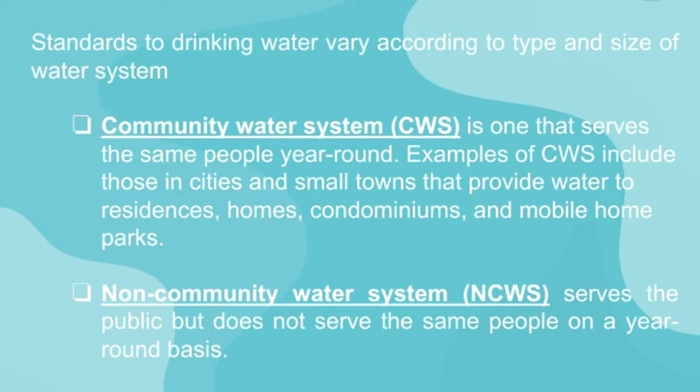A community water system serves the same people year-round, such as those in cities and small towns providing water to residences, homes, condominiums, and mobile home parks. A non-community water system serves the public but not the same people year-round. Within this, a non-transient non-community water system serves the same people for 6 months but not year-round, while a transient non-community water system serves the public but not the same individuals for more than 6 months. Rest areas and campgrounds are examples of transient non-community water systems.

Drinking water standards are classified as either primary or secondary. The primary drinking water standards are established to ensure safe, finished water, and include microbiological organisms, disinfection byproducts, organic chemicals—many of which are priority pollutants—inorganic chemicals, radionuclides, and turbidity.

The secondary drinking water standards are not related to health and are therefore non-enforceable by the US EPA. Secondary contaminants cause a variety of problems categorized as aesthetic, cosmetic, and technical effects, relating to the aesthetic quality of the water and making it more desirable to the consumer.

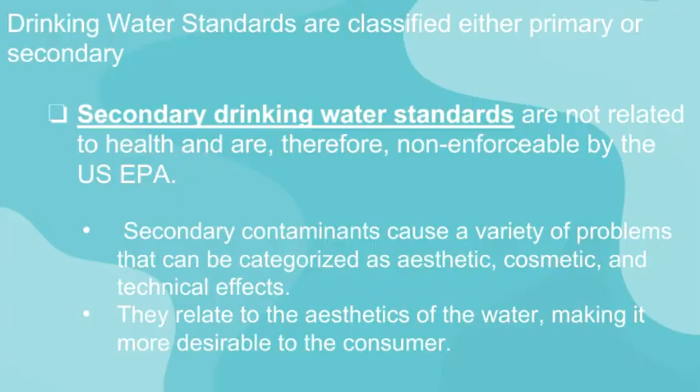Other rules promulgated by the EPA include the Groundwater Rule. Its purpose is to reduce disease incidence associated with microbial contaminants in drinking water, and it applies to all systems that use groundwater as a source of drinking water.

The Long-Term 2 Enhanced Surface Water Treatment Rule, or LT2 rule, is designed to reduce illness linked with the contaminant cryptosporidium and other disease-causing microorganisms.

The Stage 2 Disinfectants and Disinfection Byproducts Rule focuses on public health protection by limiting exposure to disinfection byproducts, especially total trihalomethanes and 5-haloacetic acids.

The Long-Term 1 Enhanced Surface Water Treatment Rule aims to improve the control of microbial pathogens in drinking water, especially the protozoan cryptosporidium, and to address risk trade-offs with disinfection byproducts.

The Filter Backwash Recycling Rule governs the process of recycling wash water from the backwashing of drinking water filters, as a method of reducing potential risk to consumers from microbial contaminants.

The Arsenic Rule requires monitoring for new systems and new drinking water sources, and also clarifies procedures for compliance with MCLs established for inorganic contaminants, synthetic organic chemicals, and volatile organic chemicals.

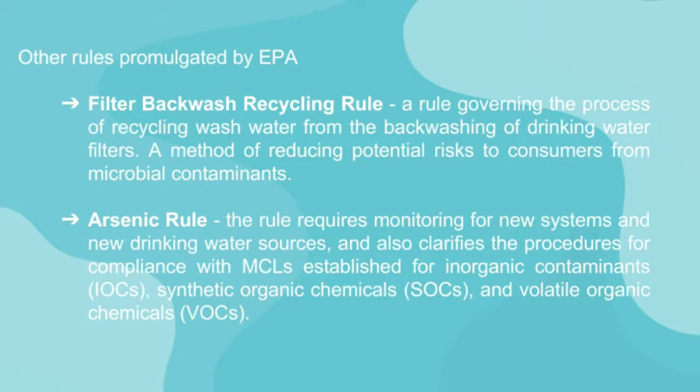The Lead and Copper Rule: on June 7, 1992, the US EPA published a regulation to control lead and copper in drinking water. The rule requires all community water systems and non-transient non-community water systems to comply.

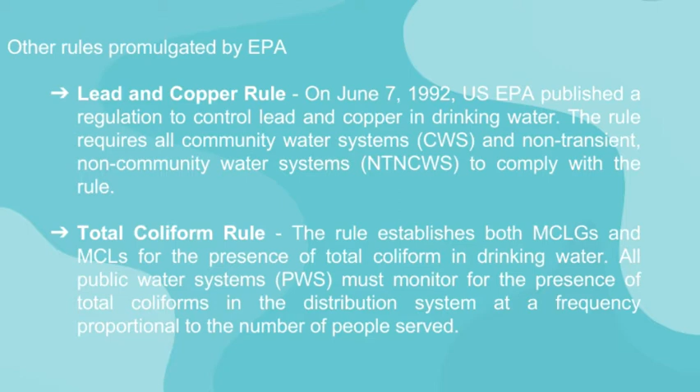The Total Coliform Rule establishes both MCLGs and MCLs for the presence of total coliform in drinking water. All public water systems must monitor for the presence of total coliforms in the distribution system at a frequency proportional to the number of people served.

The Stage 1 Disinfectants and Disinfection Byproducts Rule improves drinking water quality by providing protection from disinfection byproducts.

The Interim Enhanced Surface Water Treatment Rule improves the control of microbial contaminants, particularly cryptosporidium, in drinking water systems serving 10,000 persons or more that use surface water or groundwater under the direct influence of surface water.

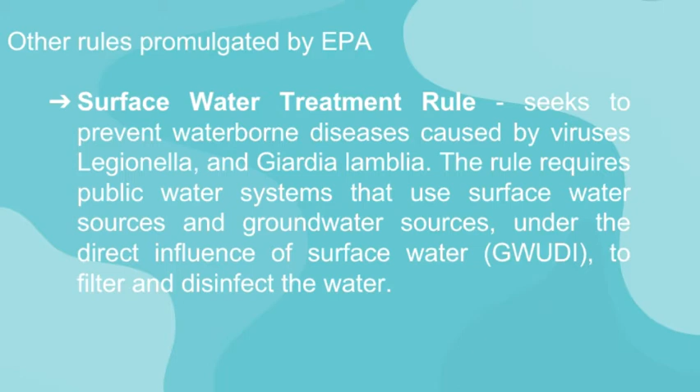The Surface Water Treatment Rule seeks to prevent waterborne diseases caused by viruses, Legionella, and Giardia lamblia. The rule requires public water systems that use surface water sources and groundwater sources under the direct influence of surface water to filter and disinfect the water.

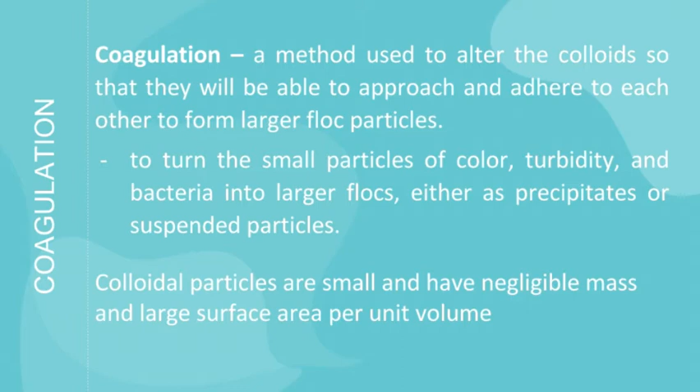Coagulation is a method used to alter colloids so that they can approach and adhere to each other, forming larger floc particles. In other words, it turns the small particles of color, turbidity, and bacteria into larger floc, either as precipitates or suspended particles.

Colloid destabilization: colloids are stable because of their surface charge. To destabilize the particles, we must neutralize this charge. Such neutralization can take place by adding an ion of opposite charge to the colloid. Since most colloids found in water are negatively charged, the addition of positive ions should reduce the charge.

Key components of a coagulant: first, the trivalent cation. As noted, the colloids most commonly found in natural waters are negatively charged, so a cation is required to neutralize the charge. A trivalent cation is the most efficient cation for this purpose.

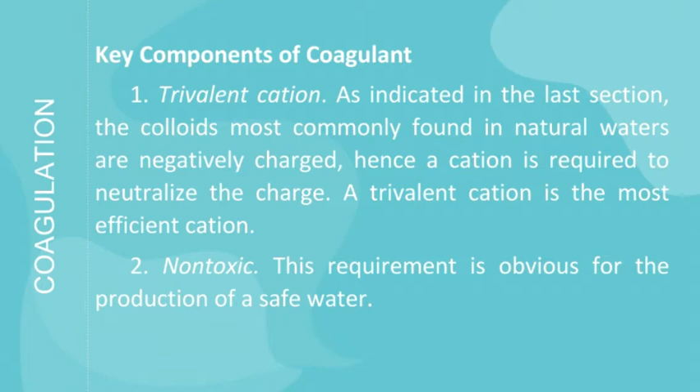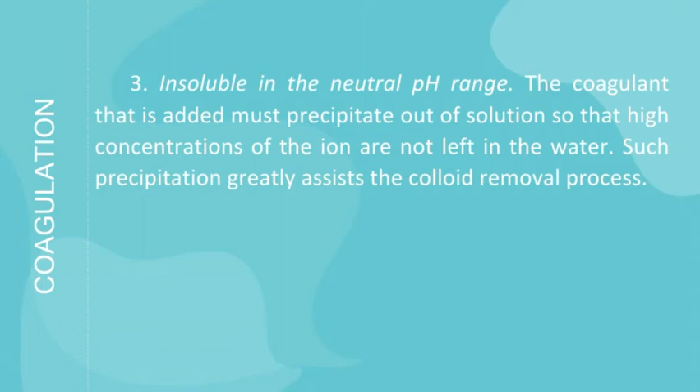The coagulant must also be non-toxic, an obvious requirement for producing safe water. Moreover, it should be insoluble in the neutral pH range. The coagulant added must precipitate out of solution so that high concentrations of the ion are not left in the water, which greatly assists the colloid removal process.

These precipitates are called floc. Floc formation is one of the most important properties of a coagulant for efficient colloid removal. The coagulation process by aluminum is done by adsorption and charge neutralization, and sweep flocculation.

Ferrous sulfate. Oxygen is required for oxidizing the ferrous ion to ferric, since ferrous hydroxide is soluble. The pH must be raised to approximately 9.5 so that the ferric ions are precipitated as ferric hydroxide.

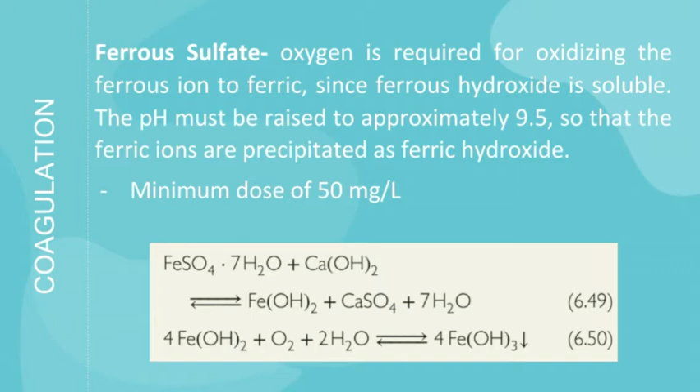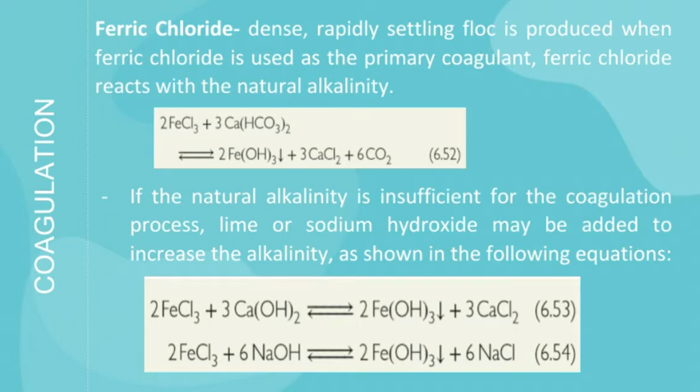Ferric chloride. Dense, rapidly settling floc is produced when ferric chloride is used as the primary coagulant. Ferric chloride reacts with the natural alkalinity.

Coagulant aids: pH adjusters. These comprise acids and alkalis used to adjust the pH of water to the optimum level during coagulation. The acid commonly used to lower the pH is sulfuric acid, while the bases commonly used to raise the pH are either lime or soda ash.

Activated silica. The addition of activated silica is especially useful for treating highly colored, low turbidity waters because it adds weight to the floc. However, activation of silica does require proper equipment and close operational control, and many plants are hesitant to use it.

Clay. It acts just like activated silica, adding weight to the floc but with slightly negative ions, useful for colored, low turbidity water, but clay is not commonly used.

Polymers are long-chain carbon compounds of high molecular weight that have many active sites, and can be anionic, cationic, or non-ionic. The active sites adhere to floc, joining them together and producing a larger, tougher floc that settles better. This process is called interparticle bridging.

Softening. Softening is the removal of polyvalent cations from water that cause hardness. The hardness in water is primarily attributed to the divalent metallic cations like calcium ions and magnesium ions. There are two softening methods: boiling and chemical precipitation.

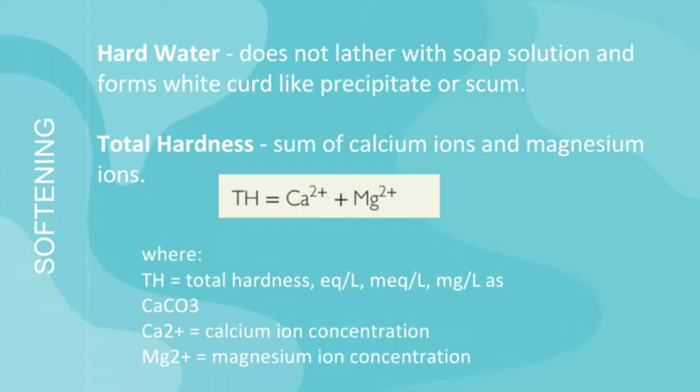There are two types of hardness: carbonate hardness and non-carbonate hardness. Carbonate hardness is associated with carbonate and bicarbonate anions. It is only temporary hardness and can be removed by boiling or by addition of lime, while non-carbonate hardness is permanent hardness and can only be removed by chemical precipitation.

Conditions: if alkalinity is lesser than the total hardness, then the carbonate hardness is equal to the alkalinity. But if alkalinity is greater than or equal to total hardness, then the carbonate hardness is equal to the total hardness, and the non-carbonate hardness is 0. The non-carbonate hardness is the difference between total hardness and carbonate hardness.

Chemical precipitation is accomplished by adding lime and soda ash to water. If magnesium ion concentration is less than 40 mg per liter as calcium carbonate, and non-carbonate hardness is not present, then soda ash may not be used.

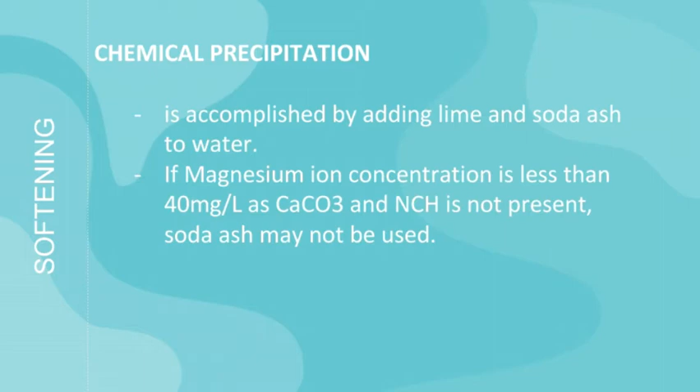The dissolution reactions and solubility expressions for calcium carbonate and magnesium hydroxide at 25 degrees Celsius.

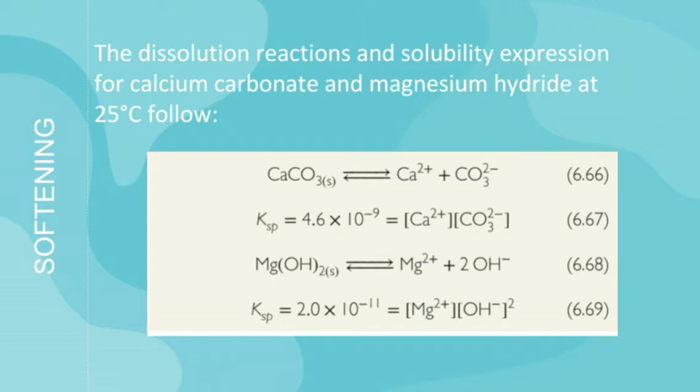When the product of the calcium ion concentration and the carbonate ion concentration exceeds the solubility product of calcium carbonate, it will be precipitated from solution, resulting in a lower calcium ion concentration.

Magnesium hydroxide is formed by adding hydroxyl ions. These hydroxyl ions are found in calcium hydroxide, which is found in hydrated lime. If hydrated lime is not available, quicklime is used to form hydrated lime. Quicklime is added to the water, and this process is called slaking.

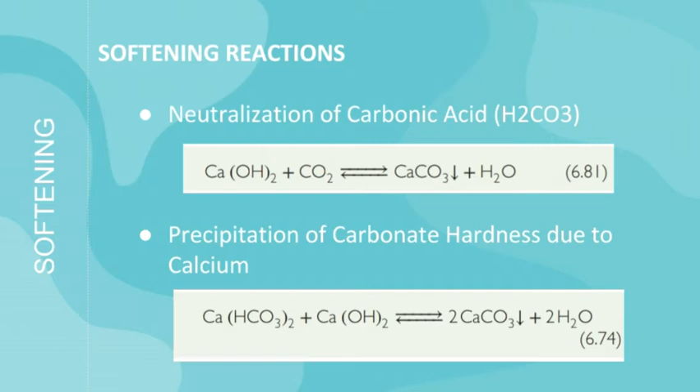The softening reactions: neutralization of carbonic acid, precipitation of carbonate hardness due to calcium, precipitation of carbonate hardness due to magnesium, removal of non-carbonate hardness due to magnesium, and removal of non-carbonate hardness due to calcium.

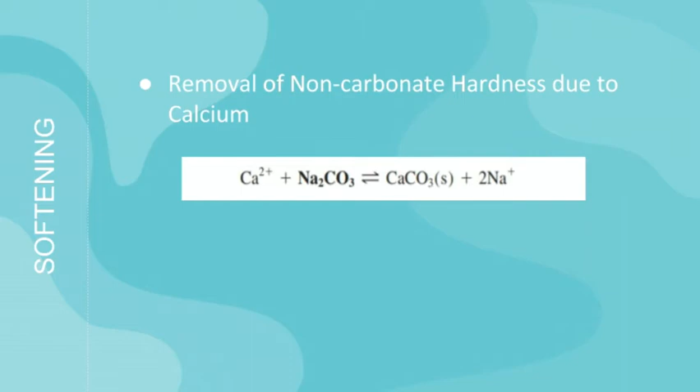Single-stage softening, or selective calcium removal, can be used on waters with a magnesium concentration less than 40 mg per liter as calcium carbonate.

First stage treatment consists of flash mixing of lime, followed by flocculation, sedimentation, recarbonation, and filtration. Flocculator clarifiers or solids contact units are often used in place of conventional coagulation, flocculation, and sedimentation. Lime is added in the first stage to meet stoichiometric requirements for neutralization of carbon dioxide, if present, and calcium carbonate hardness precipitation as calcium carbonate. An excess dosage of lime, typically 1.25 mEq per liter, is added above stoichiometric amounts to raise the pH above 11 for the precipitation of magnesium as magnesium hydroxide.

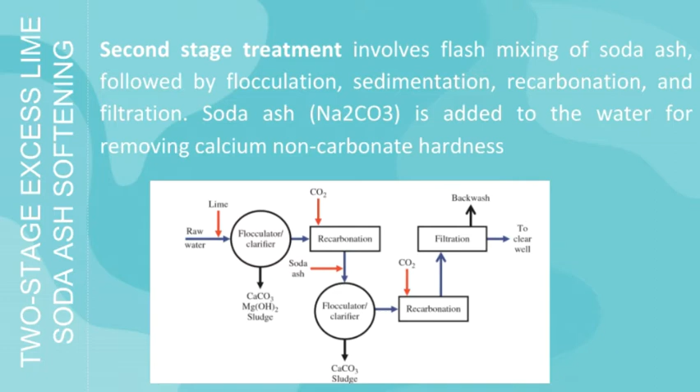The second stage treatment involves flash mixing of soda ash, followed by flocculation, sedimentation, recarbonation, and filtration. Soda ash is added to the water for removing calcium non-carbonate hardness.

Softening using the split treatment scheme involves treating a portion of the raw water by excess lime treatment, then blending this softened water with the remaining portion of raw water bypass. The ratio of bypass flow to treated flow is determined using the following equation.

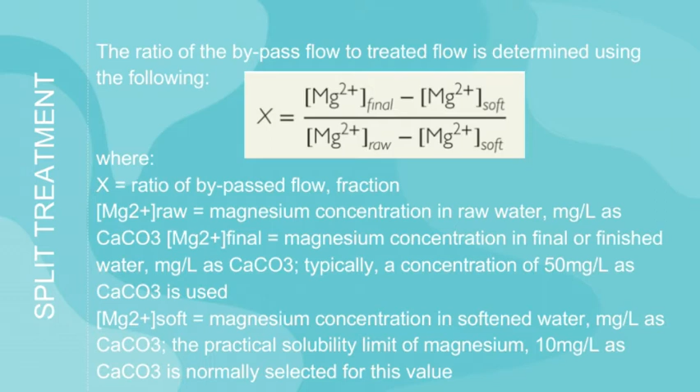Another softening method is the ion exchange process.

Mixing and flocculation: the process whereby chemicals are quickly and uniformly dispersed in the water is called mixing or rapid mixing. The degree of mixing is measured by the velocity gradient, G, which is a function of the power input into a unit volume of water.

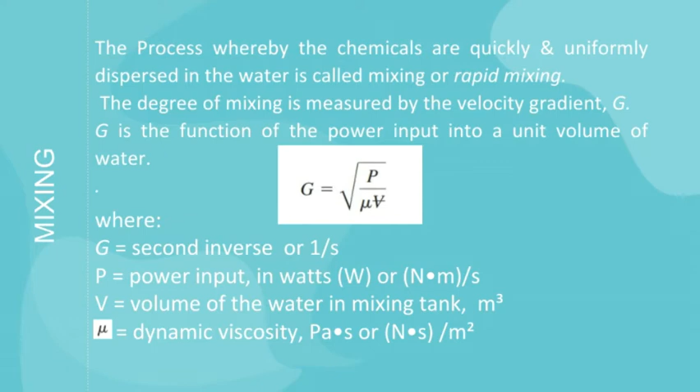If the value of velocity gradient G is high and time T is low, the flocs are small and denser. If the value of G is low and T is high, the flocs are larger.

Rapid mixing is probably the most important physical operation affecting coagulant dose efficiency. Rapid mixing can be accomplished within a tank utilizing a vertical shaft mixer, within a pipe using an inline blender, or in a pipe using a static mixer. Other methods such as parshall flumes, hydraulic jumps, baffled channels, or air mixing may also be used.

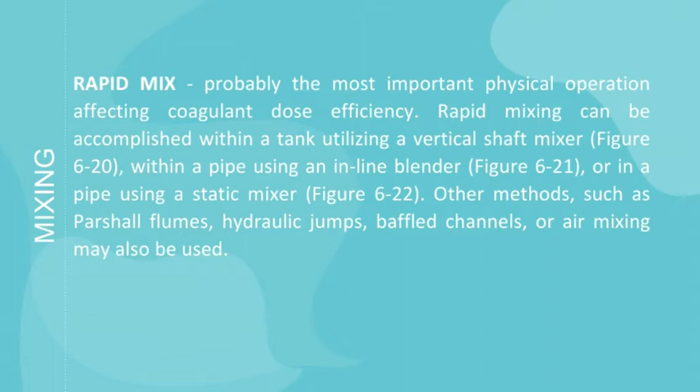In rapid mixing tanks, the radial flow impeller provides more turbulence and is preferred for rapid mixing.

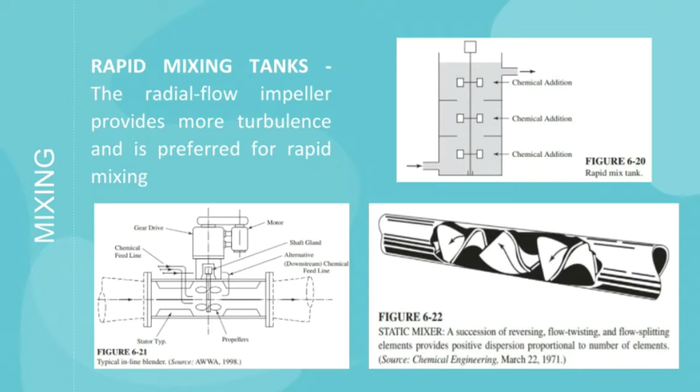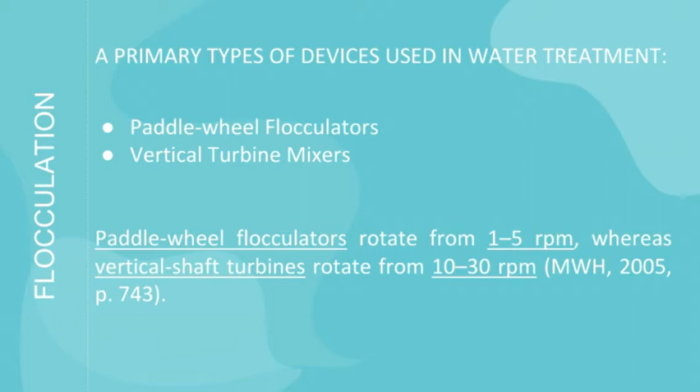Flocculation is the contacting process of precipitates formed during coagulation and softening to form larger particles called flocs, done by slow, gentle mixing. Primary types of devices used in water treatment are paddle wheel flocculators and vertical turbine mixers.

Paddle wheel flocculators may use horizontal or vertical shafts, but typically horizontal shafts are preferred at conventional water treatment plants. In recommended standards for waterworks, engineers are encouraged to use tapered flocculation to produce large, dense floc.

Tapered flocculation, employing three separate compartments each at a different velocity gradient, is normally practiced so that a dense, good settling floc is produced. Typical G values used in the first, second, and third compartments respectively are 50, 20, and 10 seconds to the power of -1.

Normally, 0.70 to 0.80 of the paddle velocity is used in design calculations.

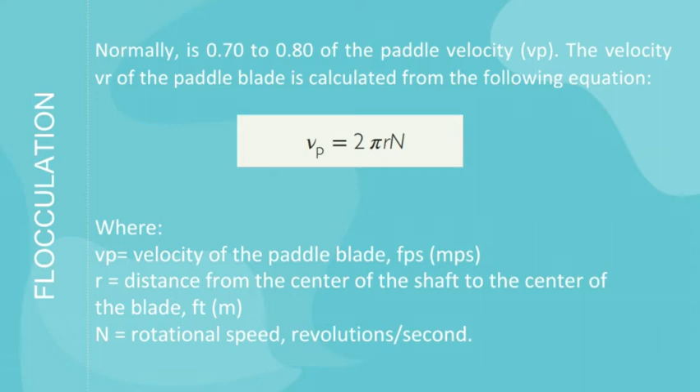Vertical shaft turbine flocculators are typically used in new water treatment plants and those that use direct filtration. This type of flocculator has an impeller attached to a vertical shaft that is rotated by an electric motor. There are different types of impellers that produce either radial or axial flow mixing.

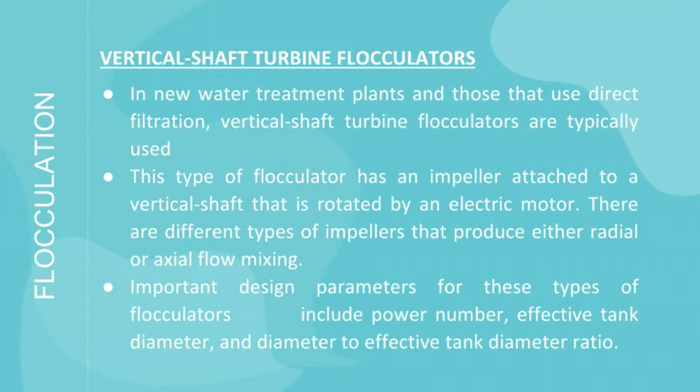Important design parameters for these types of flocculators include power number, effective tank diameter, and the diameter to effective tank diameter ratio. The power number is calculated using the following equation.

Sedimentation is a physical water treatment process using gravity to remove suspended solids from water. Gravity settling, or sedimentation, is considered a major unit operation involving solid-liquid separation using gravitational force.

Discrete settling occurs in grit chambers at wastewater treatment facilities and can be analyzed by calculating the settling velocity of the individual particles contained within the water. Three forces act on a particle as it settles: gravitational force, buoyant force, and drag force.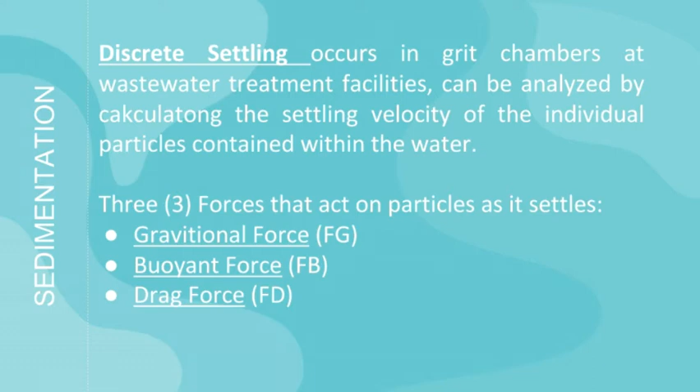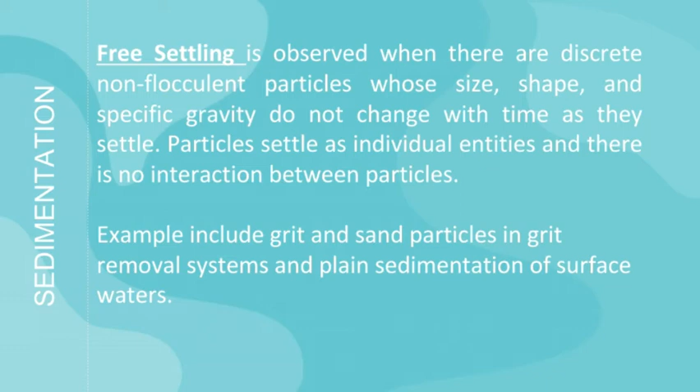Free settling is observed when there are discrete, non-flocculent particles whose size, shape, and specific gravity do not change with time as they settle. Particles settle as individual entities with no interaction between particles. Terminal settling velocity is the velocity reached by a particle as it falls through a fluid, dependent on its size, shape, and the difference between its specific gravity and that of the settling medium; it is used to sort particles by grain size.

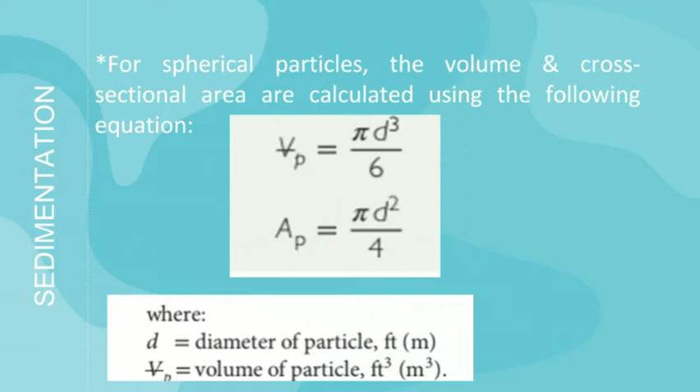For spherical particles, the volume and cross-sectional area are calculated using the following equation, leading to the settling velocity equation.

Flocculent settling occurs in primary clarifiers and during settling of coagulated water and wastewater. As flocculent particles settle, their size, shape, density, and settling velocity will change with time. Percent removal of suspended solids is then plotted as a function of depth and time, and is calculated using equation 6.96.

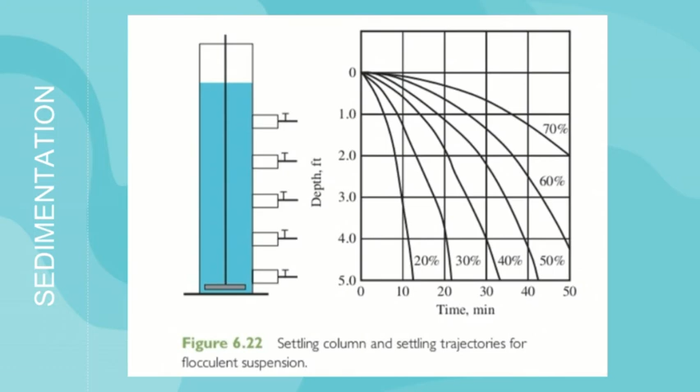Flocculent settling laboratory procedure: flocculent settling column analyses are typically performed in a clear PVC column with sampling ports spaced approximately 6 inches apart, using a column on the order of 5 to...

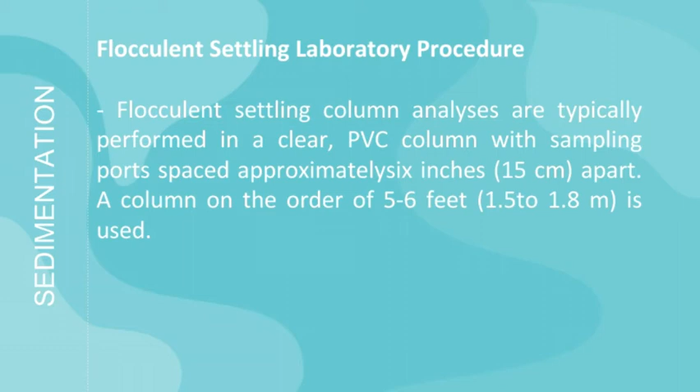Flocculent settling laboratory procedure: flocculent settling column analyses are typically performed in a clear PVC column with sampling ports placed approximately 6 inches apart, and a column on the order of 5 to 6 feet is used. The following is the procedure.

Ideal settling basin. Overflow rate serves as a design parameter used by engineers to determine the size of settling basins, whereas water treatment plant operators regulate the flow through the basin to maintain the proper detention time and overflow rate to achieve optimum solids removal.

The overflow rate is a different way of expressing the settling velocity of a particle as calculated using Stokes' law. Remember, settling velocity is a function of the diameter of the particle.

Theoretically, all particles with a diameter equal to or greater than the particle size as specified by overflow rate should be completely removed.

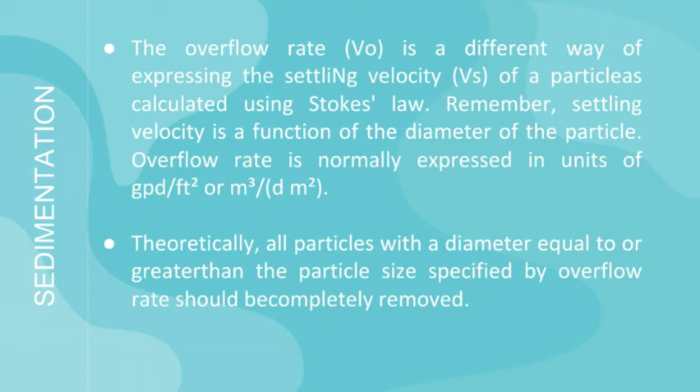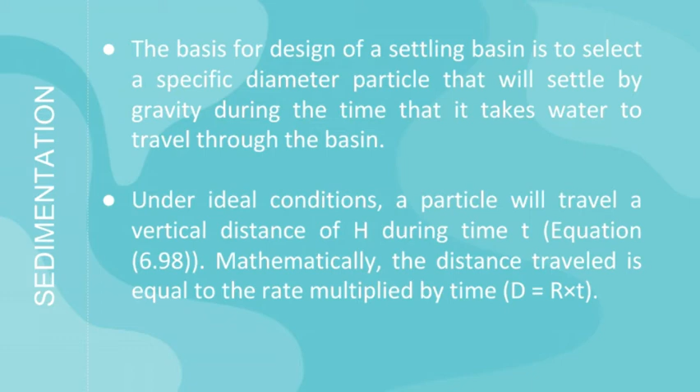The basis for design of a settling basin is to select a specific diameter particle that will settle by gravity during the time that it takes water to travel through the basin. Under ideal conditions, a particle will travel a vertical distance of h during t. Mathematically, the distance traveled is equal to the rate multiplied by time.

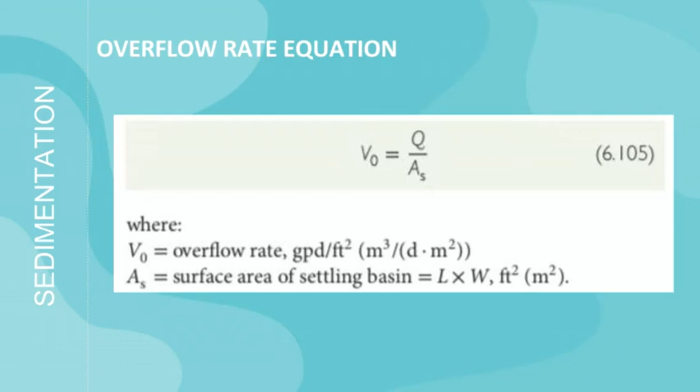Detention time or retention time is defined as the time that the water remains in the settling basin.

The weir loading rate, Q, is defined as the volumetric flow rate divided by the length of the effluent weir.

The weir loading rate is defined as the volumetric flow rate divided by the length of the effluent weir. Regulatory agencies sometimes specify weir loading rates that must be maintained in settling basins.

The settling basin design criteria are the following.

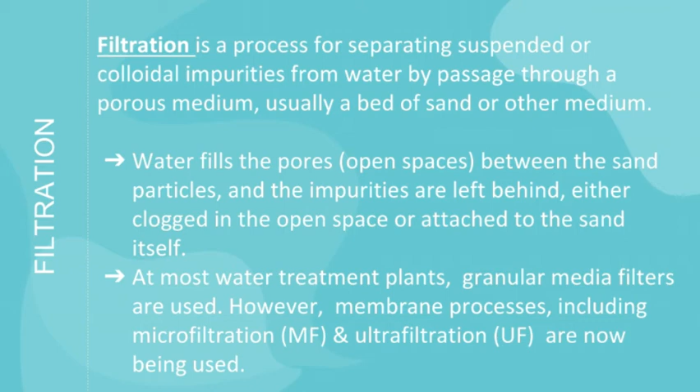Filter classification: there are numerous ways of classifying filters. Gravity filters are filters that are operated using gravity flow and operate in a downflow mode.

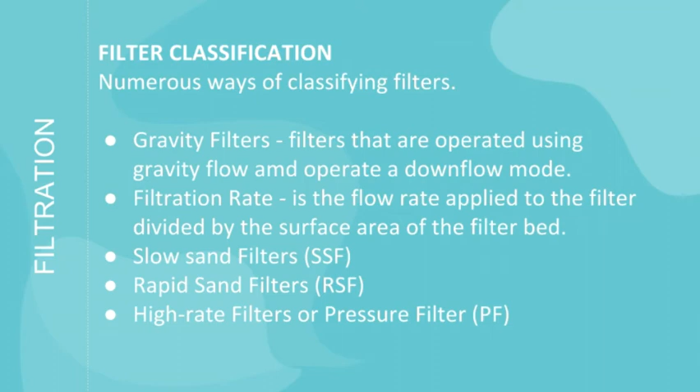Filtration rate is the flow rate applied to the filter divided by the surface area of the filter bed. Classifications include slow sand filters, rapid sand filters, and high rate filters or pressure filters.

The last classification method is based on the type of media used in the filter. Single media or monomedia filters use only one type of media, typically sand or crushed anthracite coal.

Dual media filters normally consist of a layer of coarse anthracite above a layer of sand. Multimedia filters, such as trimedia filters, consist of a top layer of anthracite coal, a middle layer of sand, and a bottom layer of ilmenite or garnet.

Suspended solids removal mechanisms depend on the filter media, specifically the effective size and uniformity coefficient.

Effective size is determined from the sieve analysis curve and represents the media size for which 10% by weight of grains are smaller. Uniformity coefficient is a measure of size range of the media, and is defined as the ratio of D10 over D60 sizes determined from the sieve analysis curve.

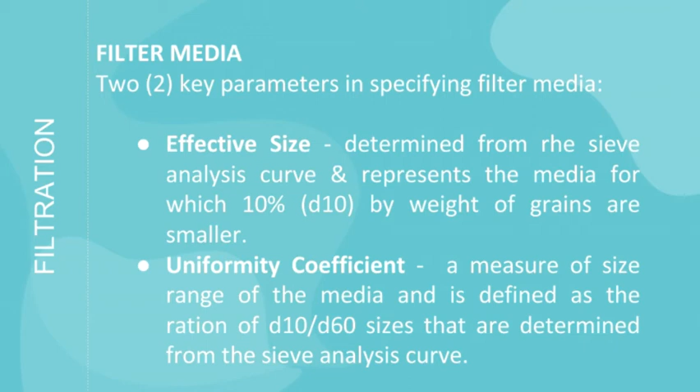Properties of filter media include effective size, uniformity coefficient, depth of media, and depth of media to effective size ratios for various types of filter media, as presented in the table.

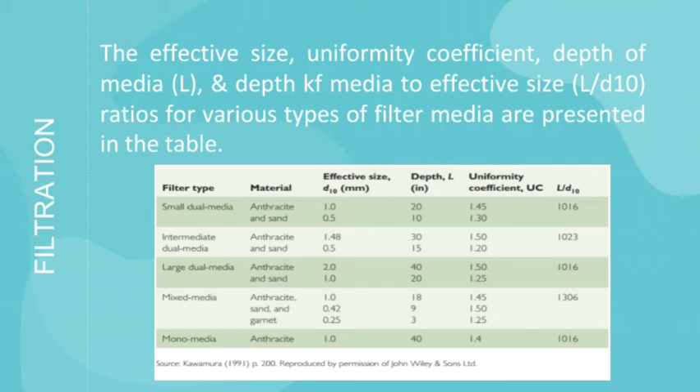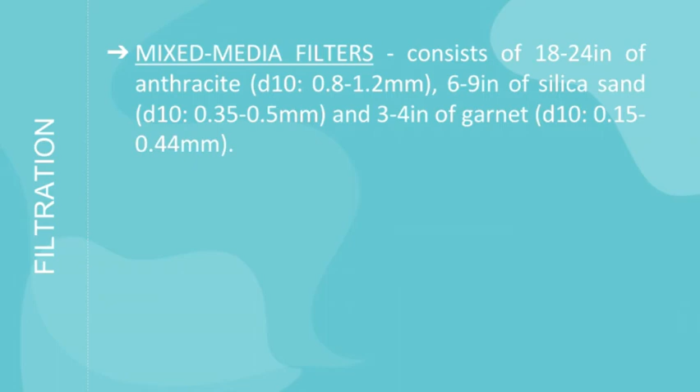Granular media filtration: the primary goal is to use the entire filter bed for solid removal rather than straining at the surface.

The Darcy-Weisbach equation.

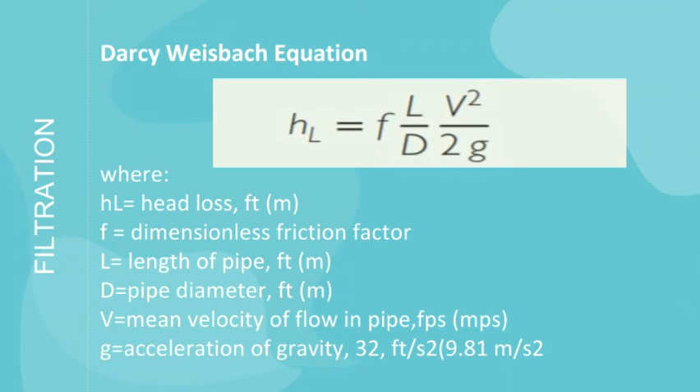The Karman-Kozeny equation for head loss across a clean filter bed is used to calculate the friction factor F.

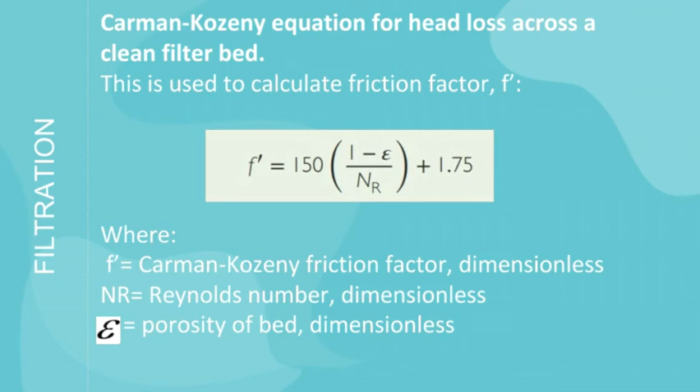The Ergun equation is the most widely used empirical equation for estimating head loss in a clean granular media filter.

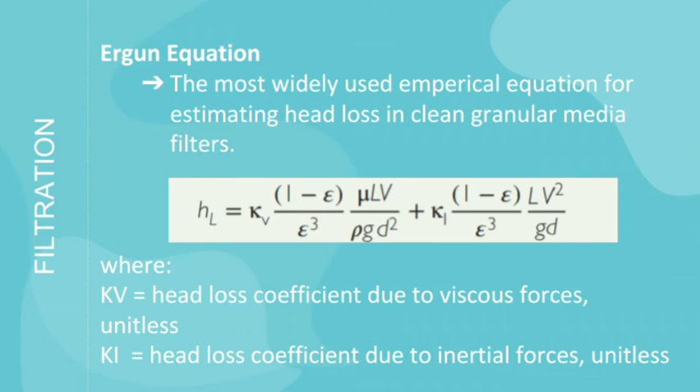Backwashing of filters: periodically, granular media filters must be backwashed to remove particulates and turbidity that build up during the filter run. Operators backwash a filter based on one of the following scenarios.

A: when the head loss through the filter reaches 8 to 10 feet. B: when the turbidity in the effluent reaches a specific level, such as 0.20 NTU, and when the filter has been in operation for a specified amount of time, for example, 24 to 96 hours.

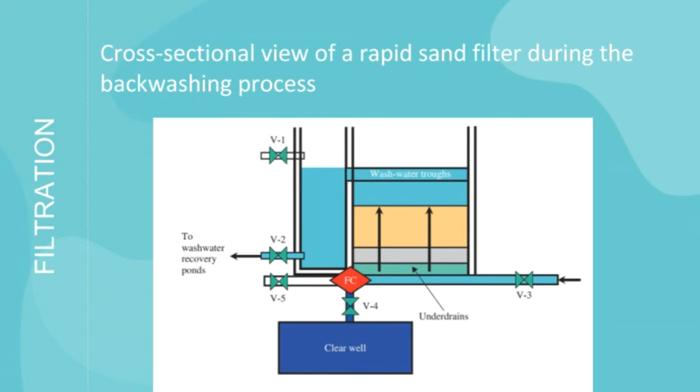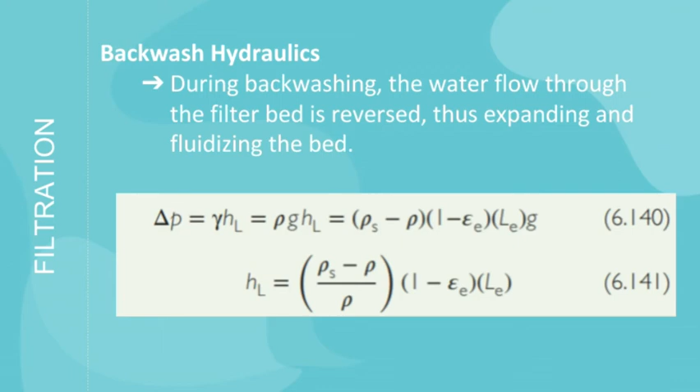Backwash hydraulics: during backwashing, the water flow through the filter bed is reversed, thus expanding and fluidizing the bed. The porosity of the expanded bed could be estimated using this equation.

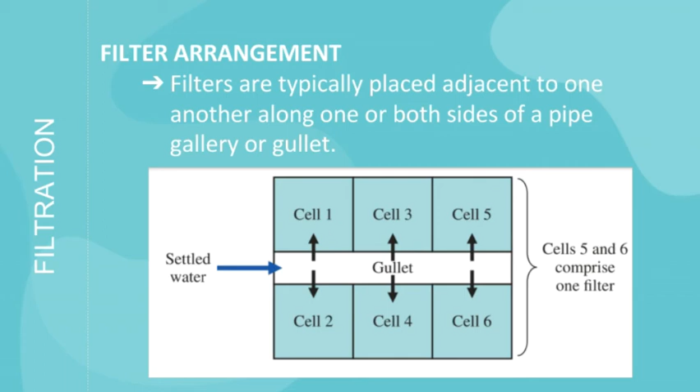Filter arrangement: filters are typically placed adjacent to one another along one or both sides of a pipe gallery or gullet. Rapid sand filters are usually rectangular in shape, with an average length to width ratio of about 1 to 2.5, and surface area ranging from 450 to 4,500 square feet.

Conventional gravity filters use length to width ratios of 2 to 1 and 4 to 1. Surface area of gravity filters typically ranges from 250 to 1,000 feet squared, and filter depths range from 12 to 20 feet.

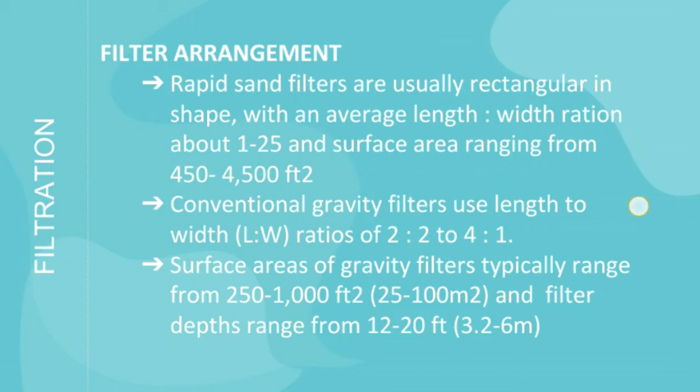Chlorine dioxide is a powerful oxidizing agent that has been used primarily to remedy taste and odor problems in drinking water. Chlorine dioxide must be generated on site by mixing solutions of aqueous chlorine with sodium chlorite, as shown below.

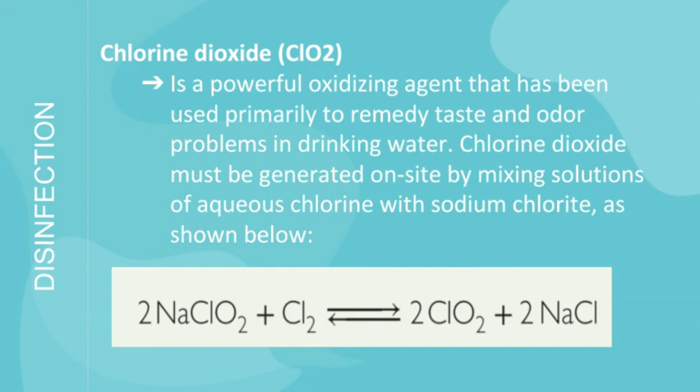Ozone is one of the strongest oxidants and disinfectants available. It is an allotropic form of oxygen that must be generated on site, typically by passing clean dry air or oxygen through a high-strength electrical field.

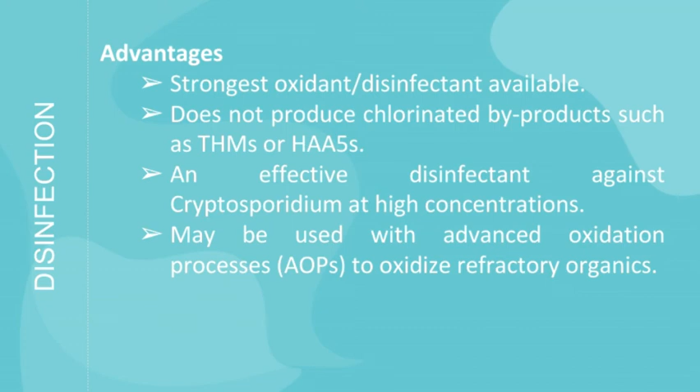The advantages of using ozone. The disadvantages.

Ultraviolet radiation, or UV, generated by mercury vapor arc lamps, is a non-chemical means of disinfection. UV radiation in the range of 245 to 285 nm is effective against bacteria and viruses. UV lamps are placed inside quartz sleeves which are then placed into the water.

The advantages of using UV. The disadvantages.

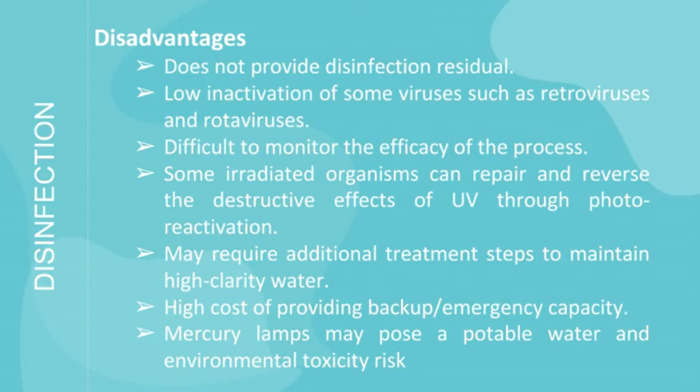Adsorption is a mass transfer process wherein a substance is transferred from the liquid phase to the surface of a solid where it is bound by chemical or physical forces.

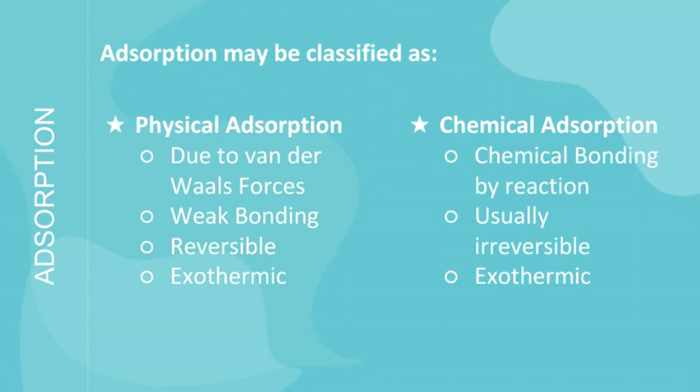Adsorption may be classified as physical adsorption or chemical adsorption. Physical adsorption is due to van der Waals forces; it has weak bonding and is reversible. Chemical adsorption is due to chemical bonding by reaction and is usually irreversible. Both classifications are exothermic.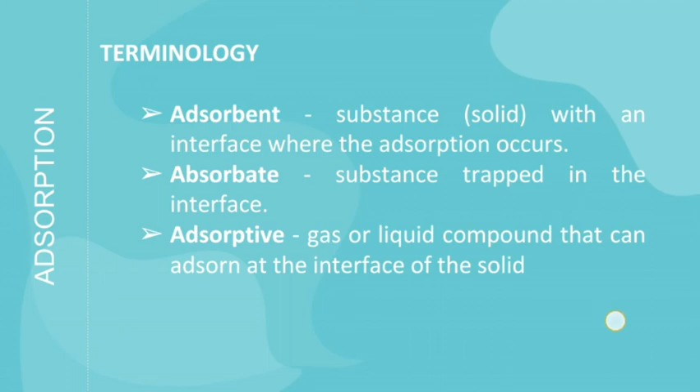Adsorbents used in water treatment: the most commonly used is activated carbon. But there are other existing adsorbents, such as natural or synthetic zeolites, natural clay minerals, silica gel, activated alumina, or silicic acid.

Activated carbon is the most commonly used adsorbent and is particularly suited to the removal of refractory organics. There are two types: powdered activated carbon, or PAC, and granulated activated carbon, or GAC.

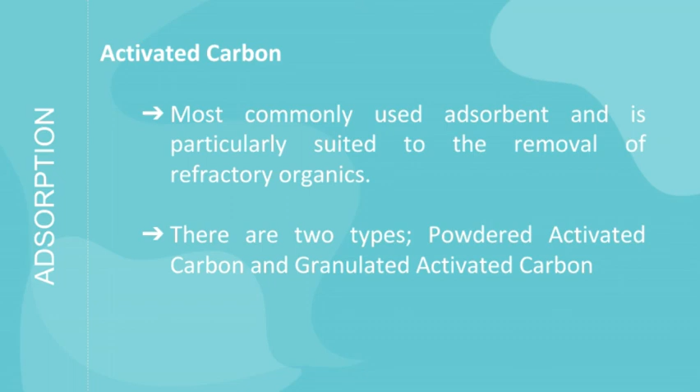The PAC is fed to the raw water as a slurry or powder and is generally used to remove taste and odor-causing substances, or to provide some removal of synthetic organic chemicals.

The GAC is added to the existing filter system by replacing the anthracite with GAC, or an additional contactor is built and placed in the flow scheme after primary filtration. GAC is proposed to be used to remove naturally occurring organic matter.

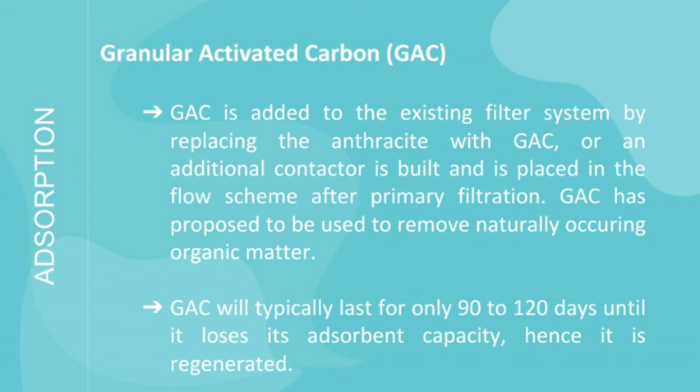GAC will typically last only 90 to 120 days until it loses its adsorbent capacity, hence it is regenerated. The effectiveness of using activated carbon.

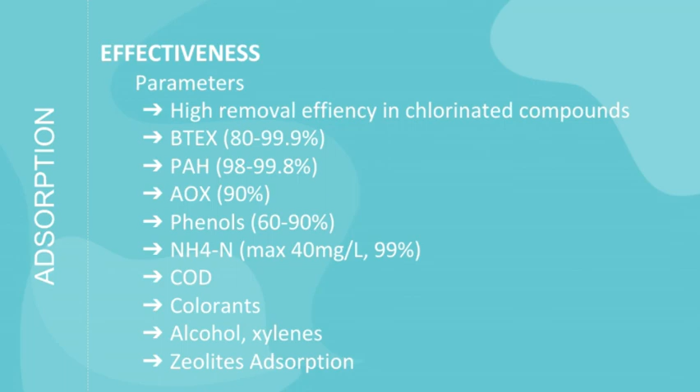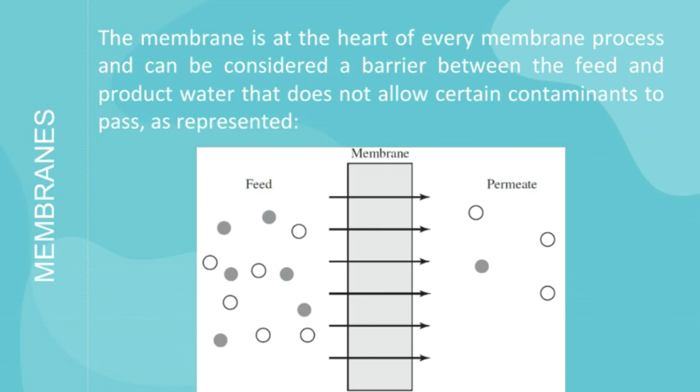The membrane is at the heart of every membrane process and can be considered a barrier between the feed and the product water that does not allow certain contaminants to pass, as represented. There is a pressure drop across the membrane, called the transmembrane pressure or TMP, that must be overcome by the water feed pump. The performance or efficiency of a given membrane is determined by its selectivity and the applied flow.

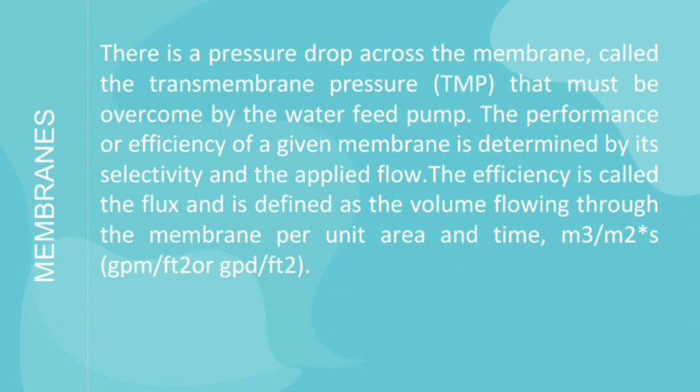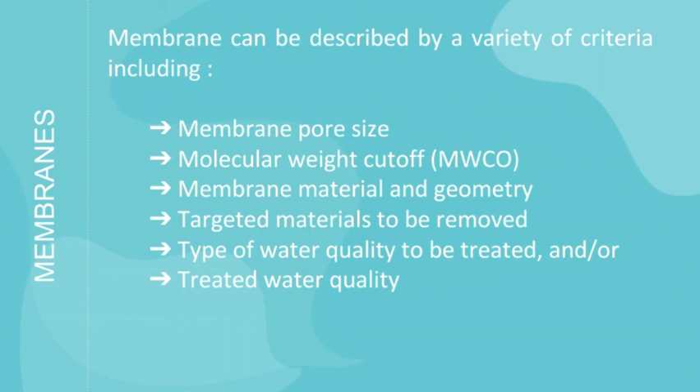Membranes can be described by a variety of criteria, including membrane pore size, molecular weight cutoff, membrane material and geometry, targeted materials to be removed, type of water quality to be treated, and/or treated water quality. Along with these criteria, membrane processes can also be categorized broadly into pressure-driven and electrically driven processes.

Reverse osmosis: this process has traditionally been employed for the removal of salts from brackish water and seawater. It depends upon applying high pressure across the membrane in order to overcome the osmotic pressure differential between the saline feed and the product waters.

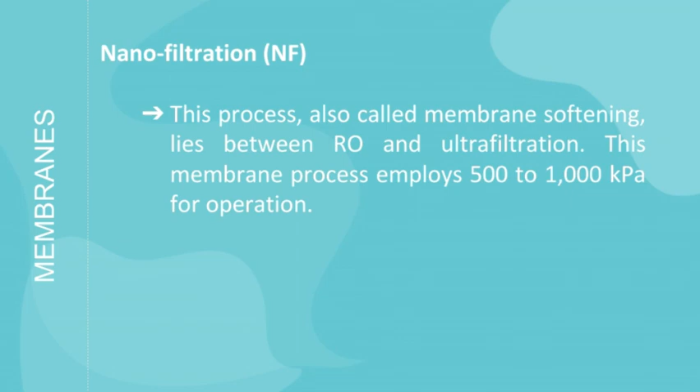Nanofiltration: this process, also called membrane softening, lies between RO and ultrafiltration. This membrane process employs 500 to 1000 kPa for operation.

Ultrafiltration: UF membranes cover a wide range of molecular weight cutoffs and pore sizes. Operational pressure ranges from 70 to 700 kPa depending on the application.

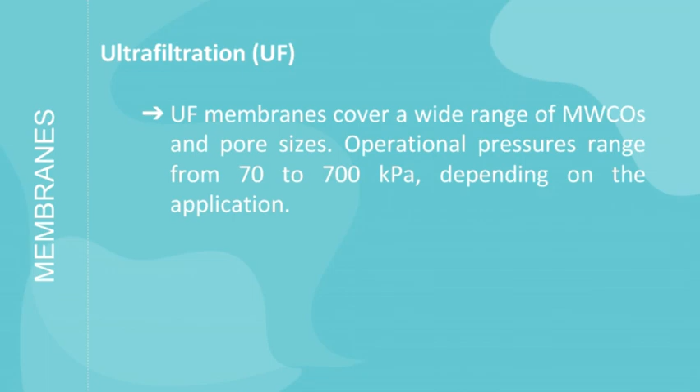Microfiltration: a major difference between MF and loose UF is membrane pore size. The pores of MF are approximately an order of magnitude greater than those of UF. The primary application for this membrane process is particulate and microbial removal.